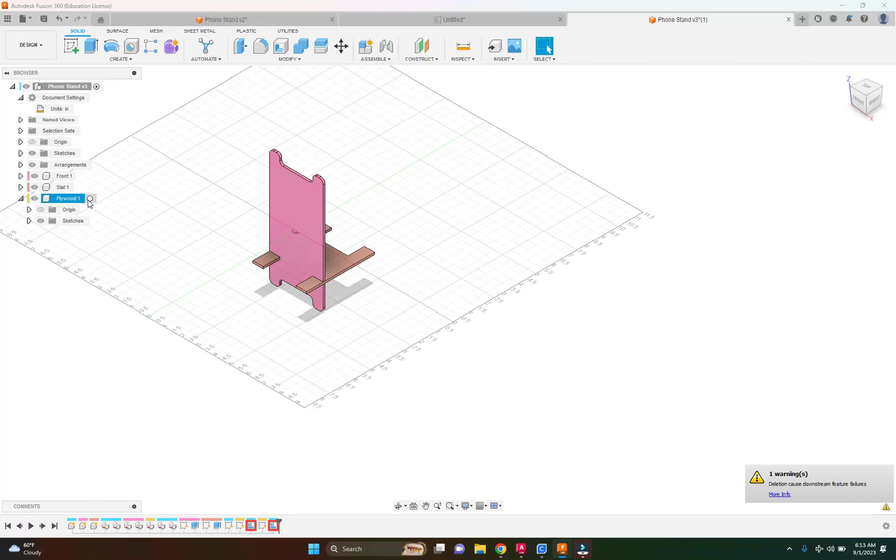Then I have my top component activated. I'm going to go down and activate my plywood component. Then I want to create a sketch, a sketch of my top layer.

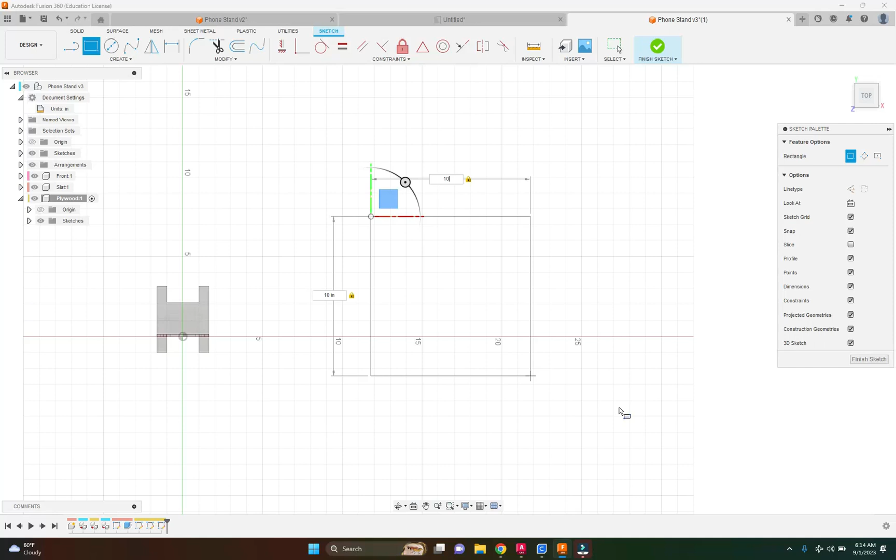I'm going to zoom way out and move over with my mouse wheel. Then I'm going to grab a rectangle and create one, 10 inches by 10 inches. It can be, and just needs to be, bigger than what you're going to be cutting. This is just a piece that we're going to be cutting on.

Click enter, and then E for extrude. I'm going to extrude this by 0.125, or 1/8 of an inch, and click OK. Then back up top here, I'm going to go home, get an orthographic view, and I can see a three-dimensional view of everything.

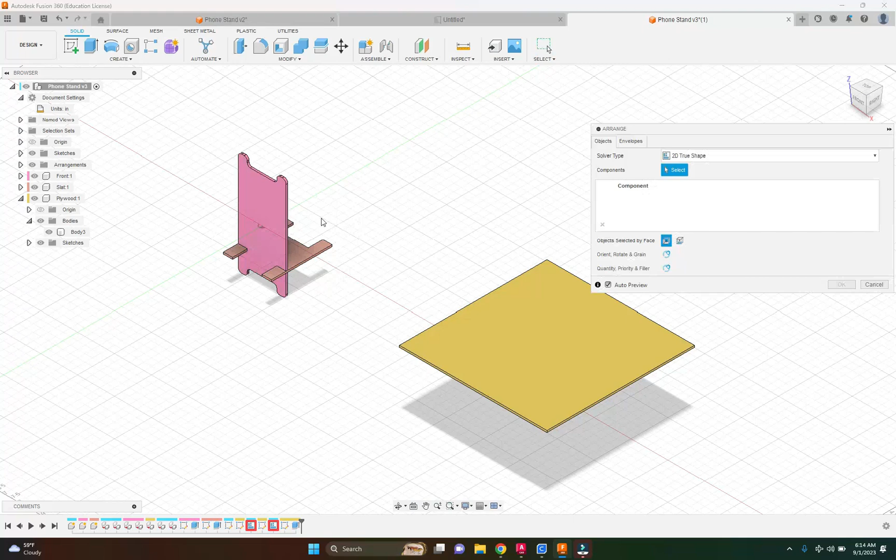Now I'm going to go to modify, then arrange, and click on the objects, this object and this object. Then I click on envelopes, and it's going to move it right here. This will lay my pieces flat for cutting purposes. Then I click OK.

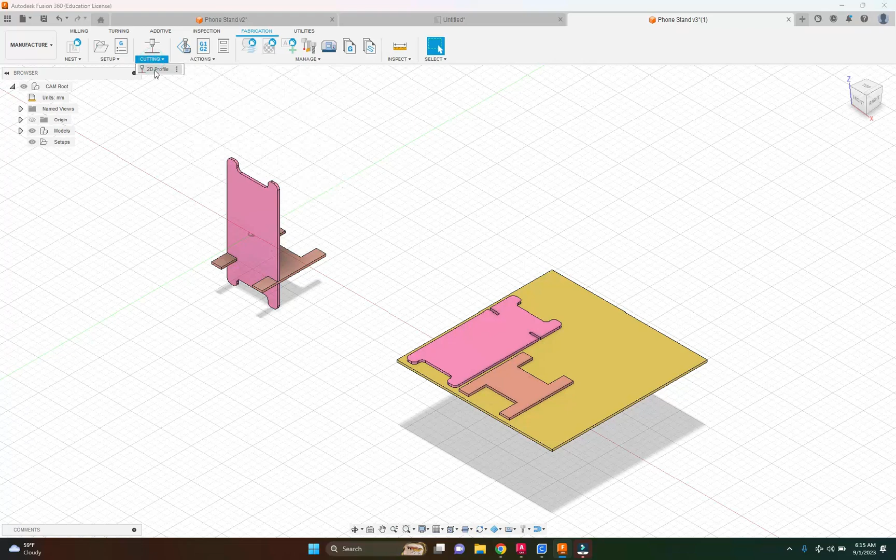Now what I'm going to do is go to manufacture. So design, you can see you have a drop-down menu. I'm going to manufacture, then go to fabrication if I'm not there already. I'm going to go to cutting, 2D profile, and then select a tool.

The tool I need to select here, I've already created. I don't believe this will pop up in your system, but I'm going to delete this tool and we're going to recreate it. Epilogue. I need a nozzle diameter of 4 and a kerf width of 0.127. These are the two numbers I want to pay attention to: 4 and 0.127.

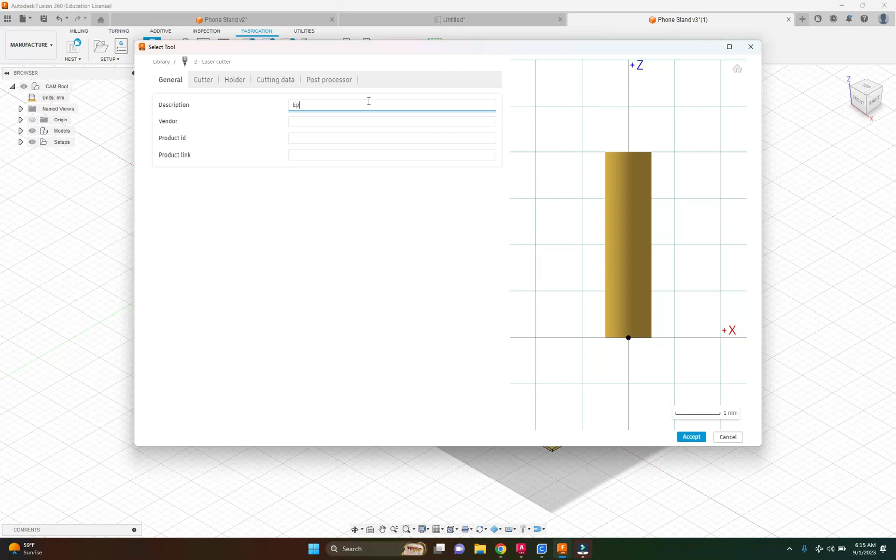So nozzle of 4. I'm going to click on the library again, plus symbol, laser cutter, and then I want a description here. This is going to be Epilogue laser, and this is our PCHS laser. Epilogue laser cutter, nozzle I believe was 4 and then 0.127. We'll check this in a second.

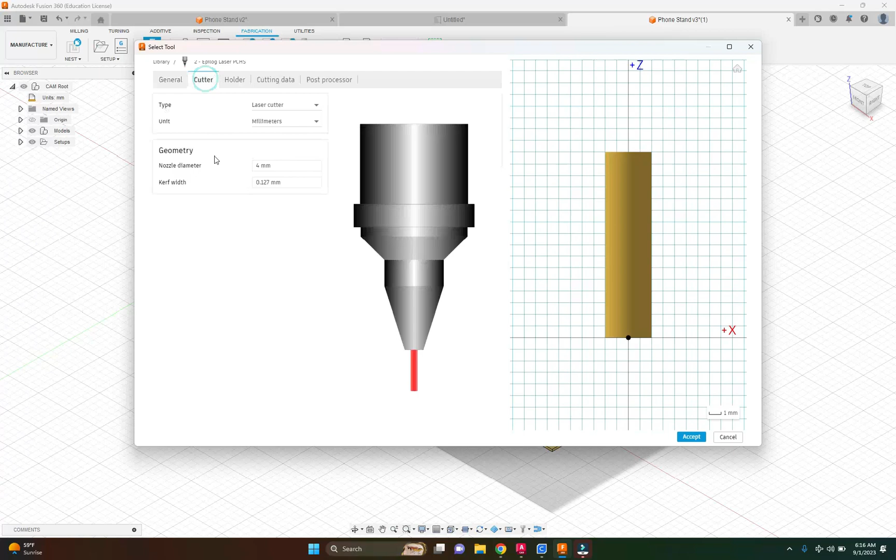General Epilogue laser, I'm going to put PCHS here so I know where it's at. Cutter, 4 millimeters, 0.127. Click accept, and did I do that correctly? Yes, that's correct. Okay, so I have Epilogue laser PCHS. I'm going to delete this one so I only have one tool on there.

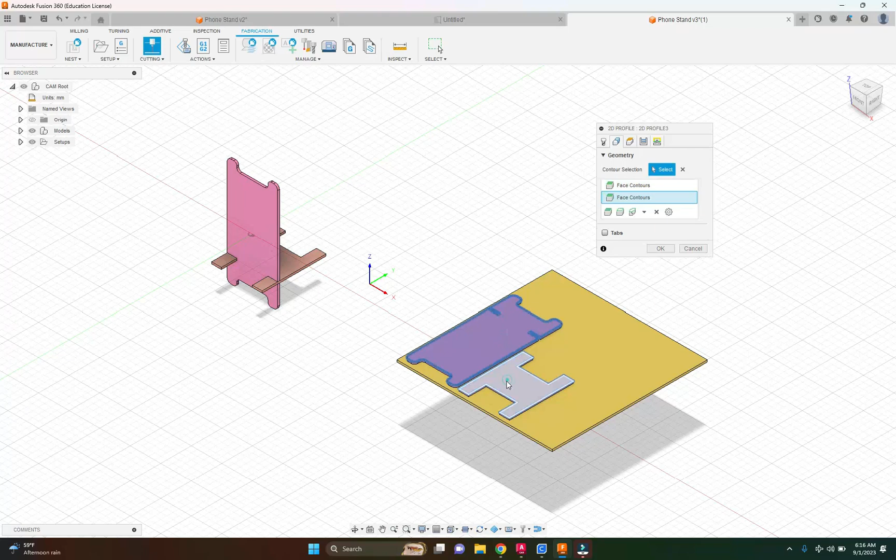This here is going to be for laser cutting. Then I click on select. Now I want to select what I want to cut here, my geometry. I'm going to select this here and this here. Then I click OK.

And then this will stretch it out. That's okay, imagine this being a giant piece of plywood, and this is just how we're going to have to work with Fusion 360 for this project. But it's going to cut this blue line out. We're not going to worry about anything else on here.

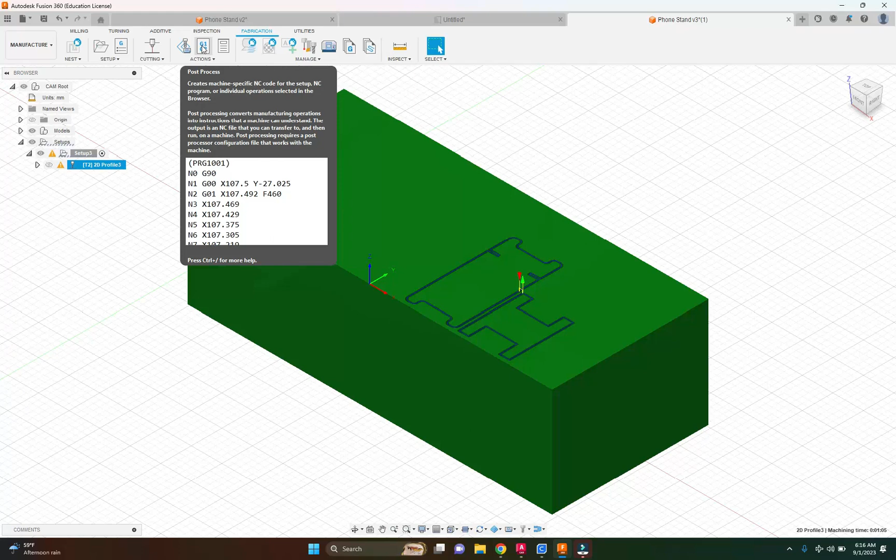Then I'm going to do what's called post-process, the G1, G2. I want to post-process this here. I'm going to look for a post. This may pop up on your computer. If not, we're going to have to add it.

Now I can edit the post configuration here. This says download Visual Studio Code—I'm not going to worry about that, we don't want to edit that file. I want to access the files. You can search for it, but we're looking for AutoCAD.

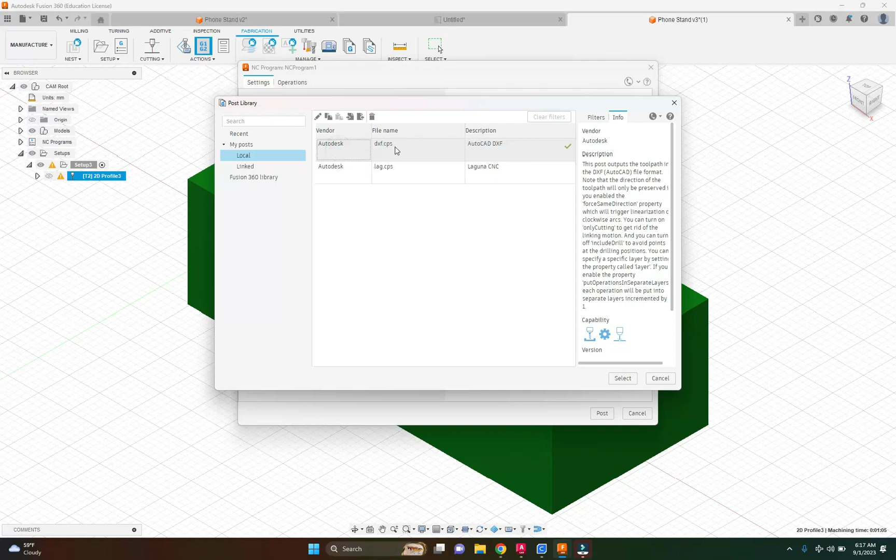DXF.CPS. If I go to the Fusion 360 library, this usually pops up down here. If this does not pop up, you can see Autodesk AutoCAD DXF right here. If it does not pop up, you're going to have to download it off of my link on Canvas. Then I click select here, and yep, copy to my post there.

Okay, on here, I would name this. I'm going to name this phone stand, and I'm going to put my name on it too, just because when I download these here, it's going to make it way easier. So I'm going to put first name, last name on there.

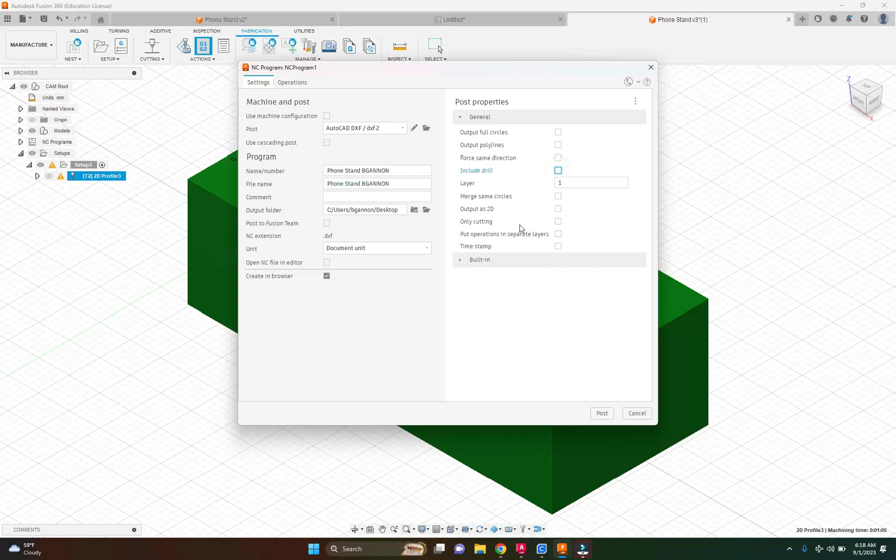Output folder, I'm going to my desktop—choose where you want to go. I only want to include the drill—you may have some other things selected on there, or actually I don't want to include the drill. I only want to include cutting. So don't include the drill, only cutting, and click post.

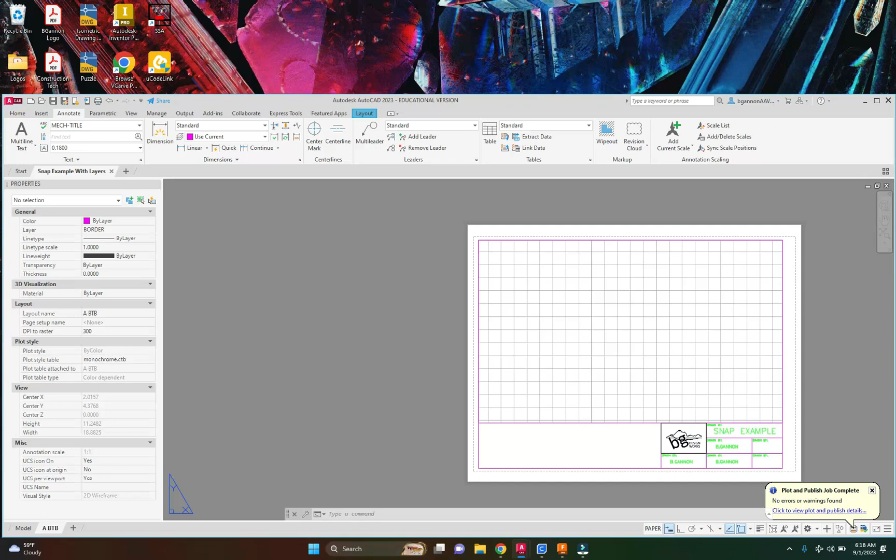Once you click post, it should successfully post if you've done it correctly. If I check it out on my desktop, phone stand—if you are on a PC, you can open it directly in AutoCAD, and you should see just some red lines of what is actually going to be cut. If I zoom out here, if you've used AutoCAD before, this is actually what is going to be cut. You're going to submit this DXF file that you created to Canvas. If you don't have AutoCAD on your Mac, you can download it, but it will take some time.

And that's how we're going to create our file for laser cutting.